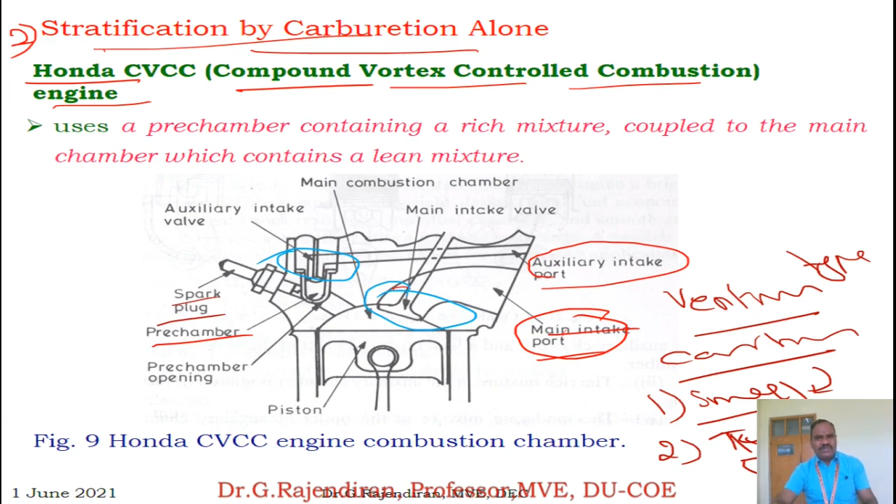Now as far as the working is concerned, during the intake stroke, a large amount of lean mixture is drawn in. Lean mixture in the main combustion chamber, and rich mixture in the pre-combustion chamber. The pre-combustion chamber has rich mixture, the main combustion chamber has lean mixture, so the overall air-fuel ratio is lean.

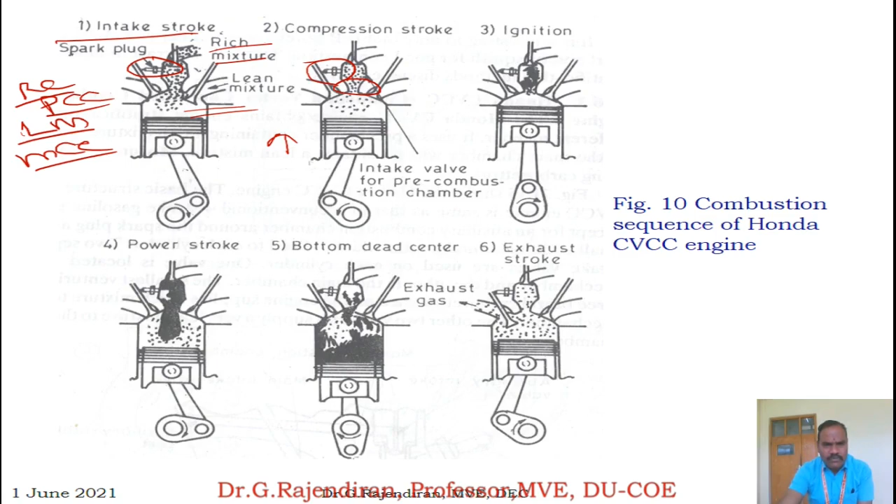Now at the end of the compression stroke, the spark plug is located here, and the rich mixture is ignited by the spark plug. Here is the moderate mixture, at the vicinity of the outlet to the main chamber, and a lean mixture. So here there are three categories: rich, moderate, and lean mixture. Clear?

The rich mixture in the auxiliary combustion chamber is ignited by the spark plug, and this will create the flame front. This flame front travels from the pre-combustion chamber to the main combustion chamber, combustion takes place in the lean mixture in the main chamber, and during the exhaust stroke it goes out as exhaust. So this is compound vortex controlled combustion.

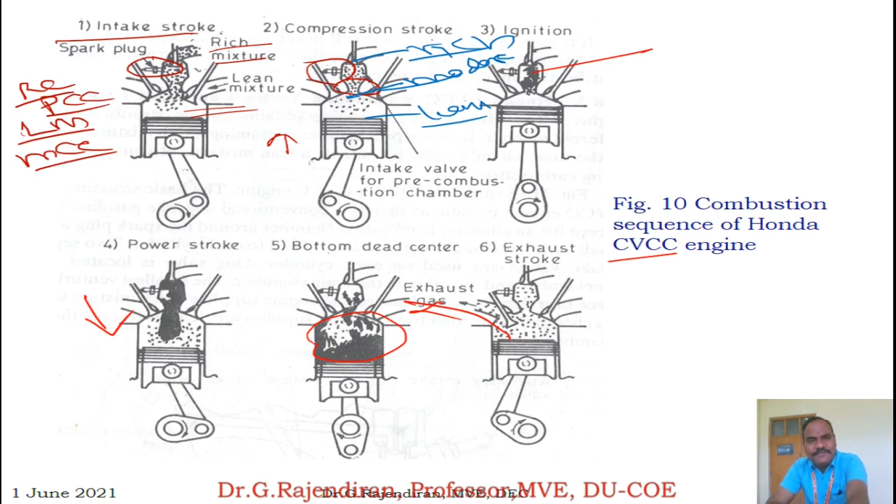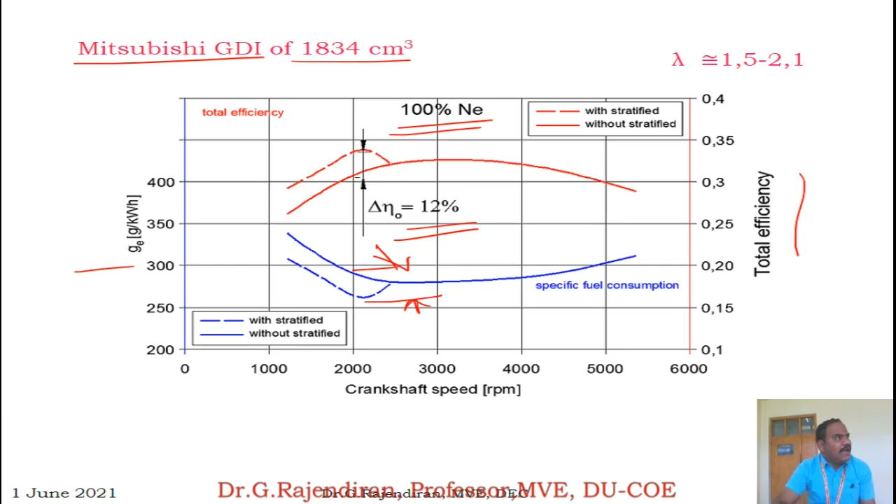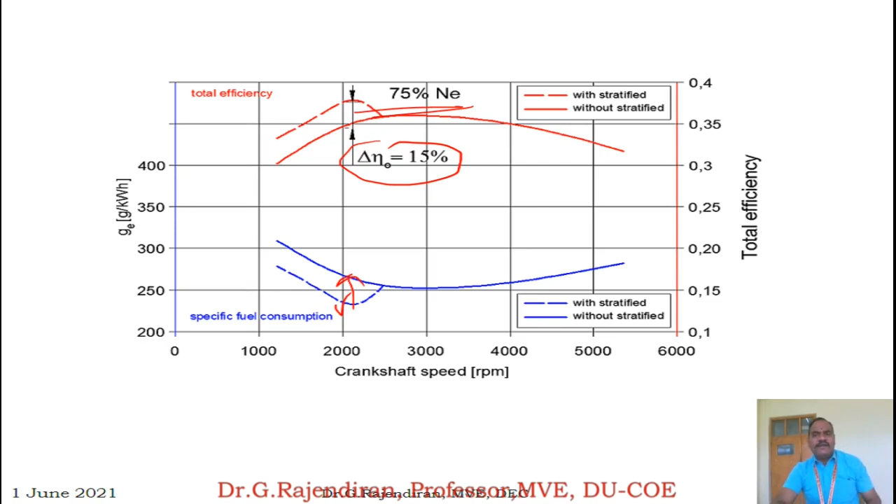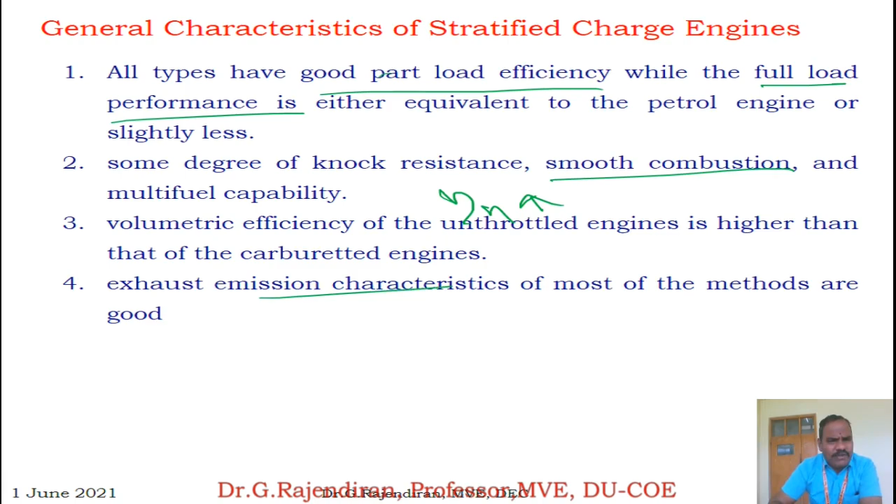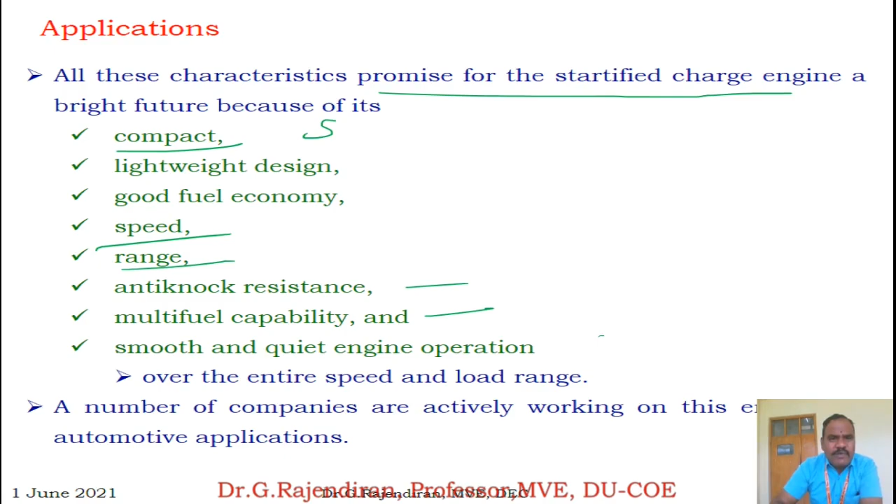If there is no throttling, the volumetric efficiency is definitely improved, and when using a lean mixture, exhaust emission characteristics are improved. Stratified charge engines are compact, lightweight, with good fuel economy, higher speed, higher range, higher knock resistance, multi-fuel capability, and smooth and quiet operation. Weight to power is less, fuel consumption is less, speed can be increased, and power can be varied. Anti-knock means very lean mixture, less octane requirement, reduced knocking, so smooth combustion.

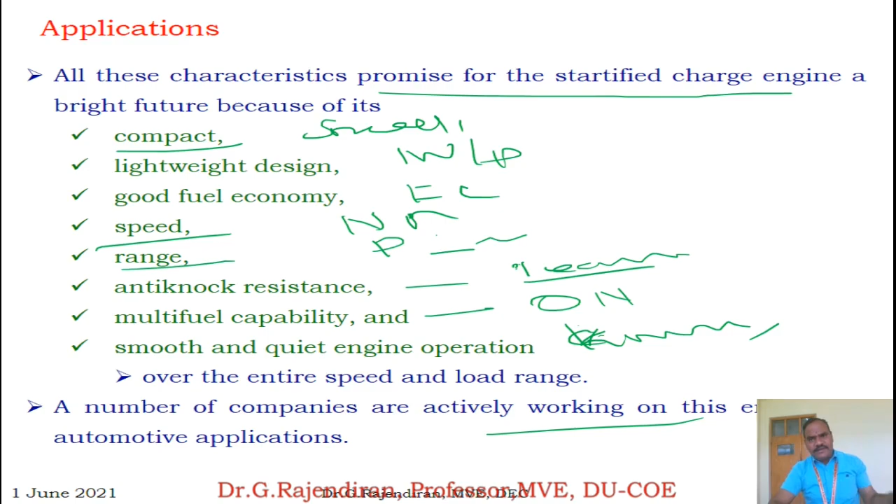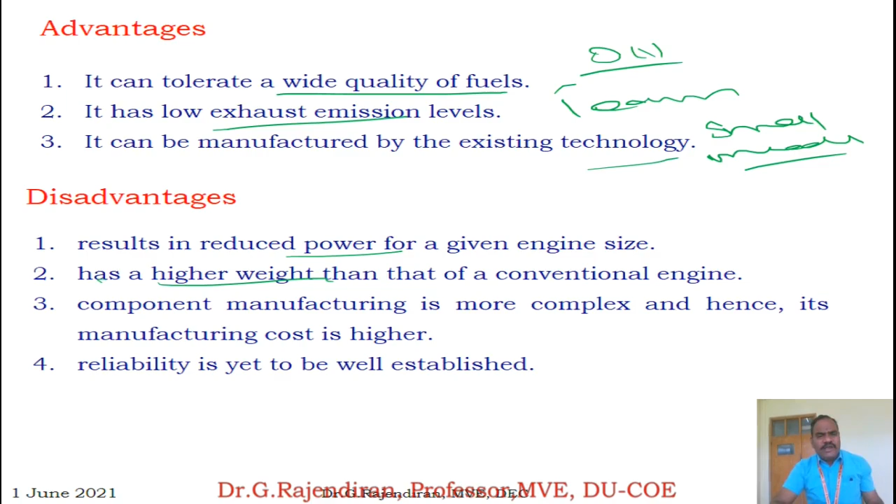A number of companies are actively working on this engine for automotive applications. As for advantages, it can tolerate a wide quality of fuel, not only octane number as in SI engines, low exhaust emission with lean mixtures, and it can be manufactured with existing technology with small modification. For a given engine size it may result in reduced power, additional fuel injection equipment adds weight, precision injection timing may increase cost, and reliability is still under research.

With this, the chapter is over.